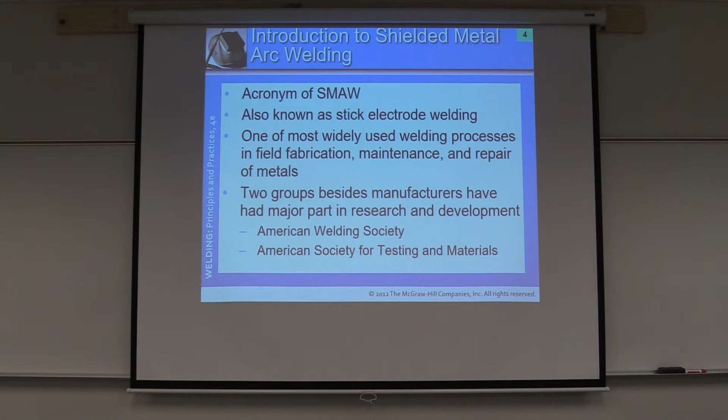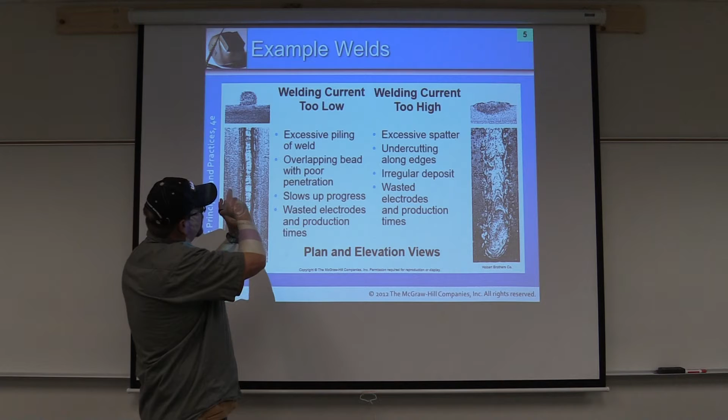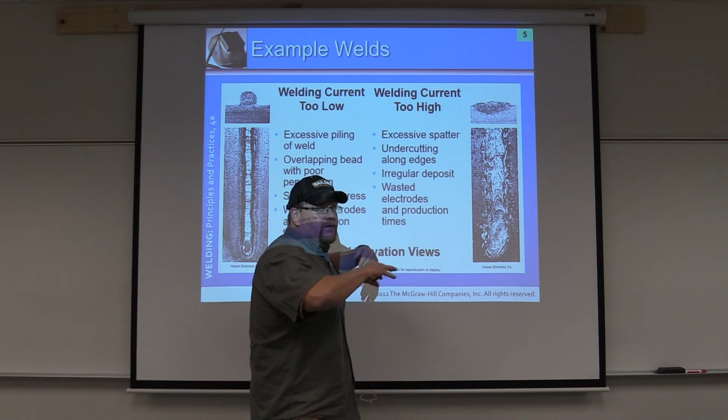Good examples, we'll see most of these in the welding shop, we'll go through a lot of this. However, let's hit a few points here. So you notice how this weld profile is very tall and crowned over. Looks like it didn't get that great of fusion into the base metal and so forth. On this side, you can see it's the exact opposite. It's really wide, very flat. So that's really high welding current.

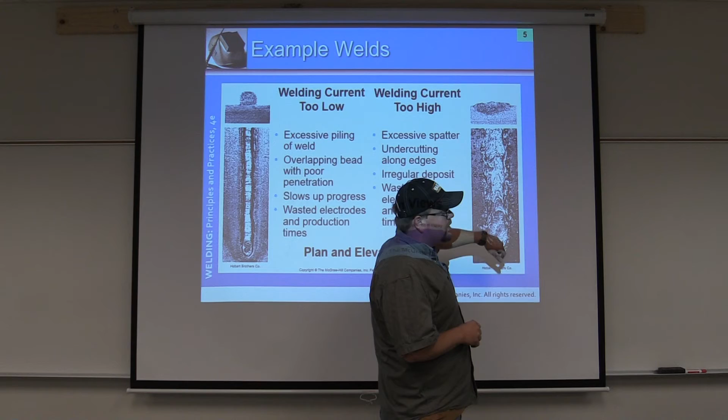We've got some V-shaped notches within our welding material. That also means we're going too fast. Of course, we have to with too high heat. In this case, it's a nice rounded profile. We went probably about the correct speed. However, we just didn't have enough current to be able to fuse into the base metal.

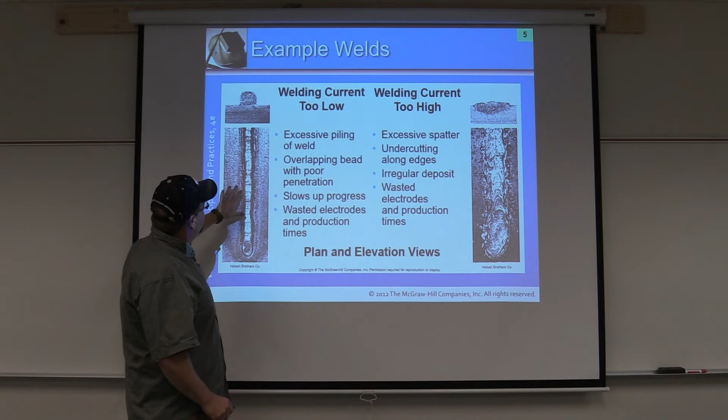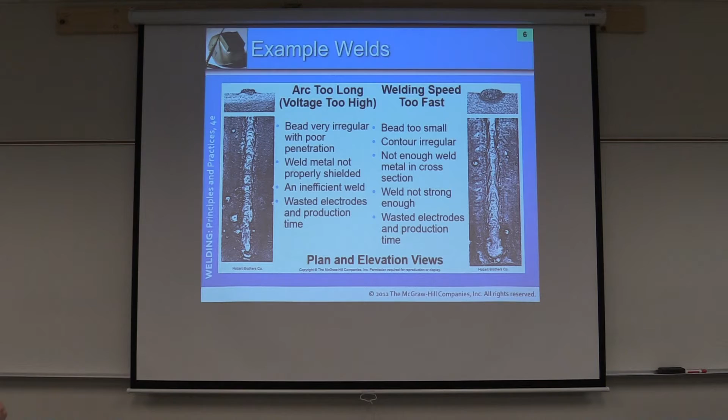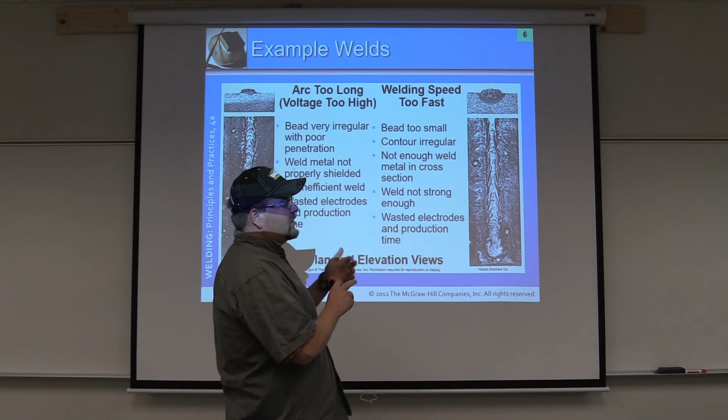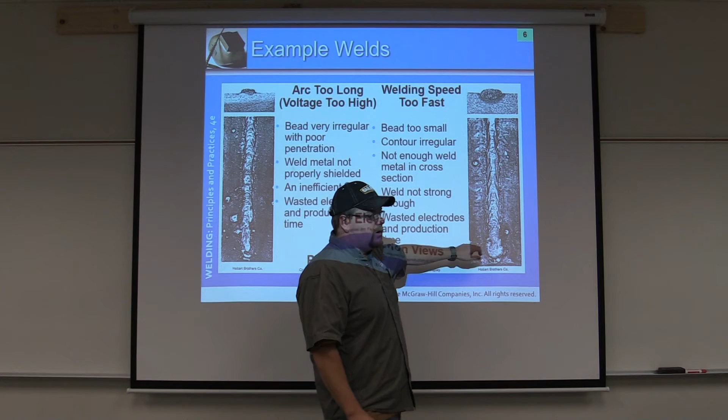Welding speed's too fast. Again, here on the right hand side you can see we've got our sharp elongated notches. Now certain materials, we're going to kind of look for that as well. So sodium cellulose rods, 60-10, 70-10, 80-10, 70 plus, and so forth, you're going to want to see a little bit of ripple, but that's some different manipulation of the electrode for different reasons as well. You'll see this, it's very common in API 1104. We'll discuss that on a one-to-one basis as we're welding in the shop.

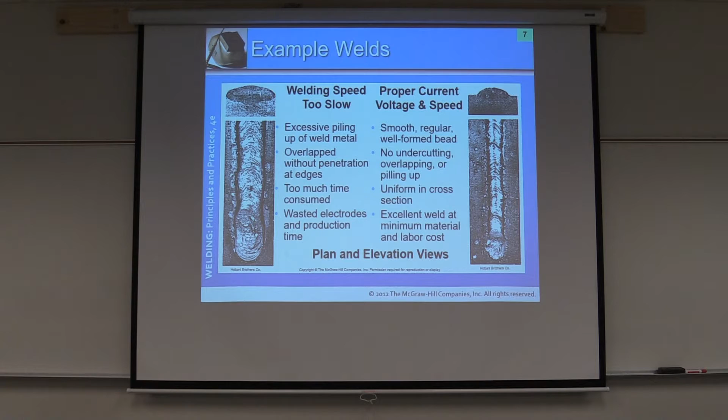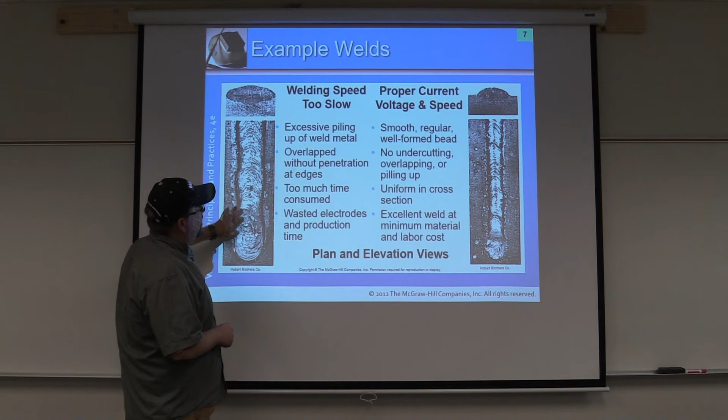Too slow. This one's about right. Okay, so you can see this one's real wide. Now this one can also be associated with a weave bead. If you're covering a couple distances, you may see a couple rod distances, you may see a little wider profile. It's got a nice gradual roundedness to it. The weld beads look pretty good. There's a little bit of spatter, so forth, we'll discuss that in the shop itself. But on this one, this is a nice single bead, just a stringer bead dragging it along instead of a weave bead. Okay.

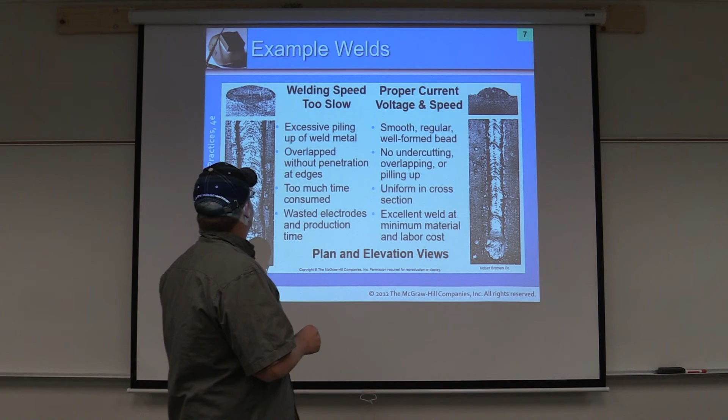All right, so we're going to start out of the book, page 310, chapter 12, right-hand column, underneath Introduction to Covered Electrodes. The type of covering influences the degree of penetration of the arc and the crater depth. Now that's a bulleted point. Definitely.

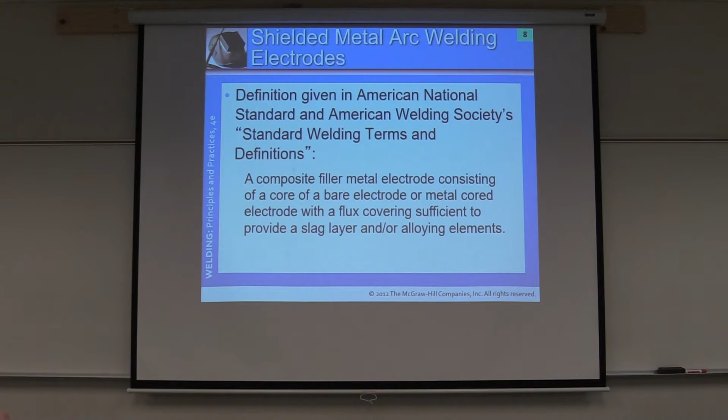So it affects the extent of the recrystallization and annealing of previously deposited layers as well. Sorry, let me back up here, I read off the PowerPoint. Now we're going back to the book, page 310, under that same paragraph. Let's read that paragraph, and then we'll come back to the PowerPoint.

The type of covering influences the degree of penetration of the arc and the crater depth. The proper electrode selection therefore makes it possible to obtain sound welds in close-fitting joints and to avoid burning through poorly fitted joints. Again, everything is relative to what we need. There are times when we're going to want to open up the keyhole and make a burned-through weld joint, okay?

All right, let's continue reading. Since the covering influences the extent of penetration, it affects the extent of recrystallization and annealing of previously deposited layers. This characteristic improves the internal or radiographic quality of the weld. The low electrical conductivity of the covering permits the use of electrodes in narrow grooves. The covering also reduces weld spatter. So it helps stabilize the arc as well.

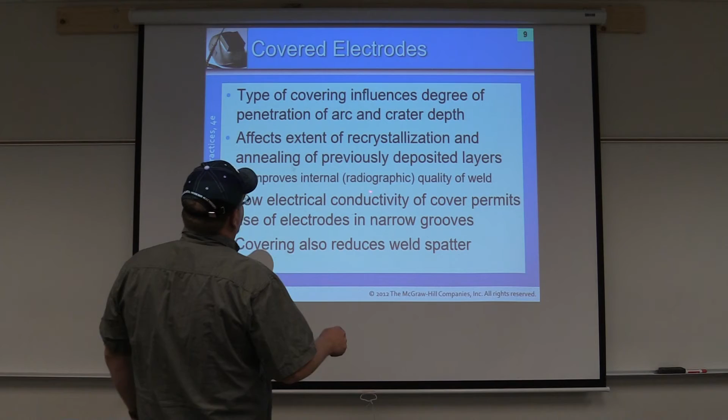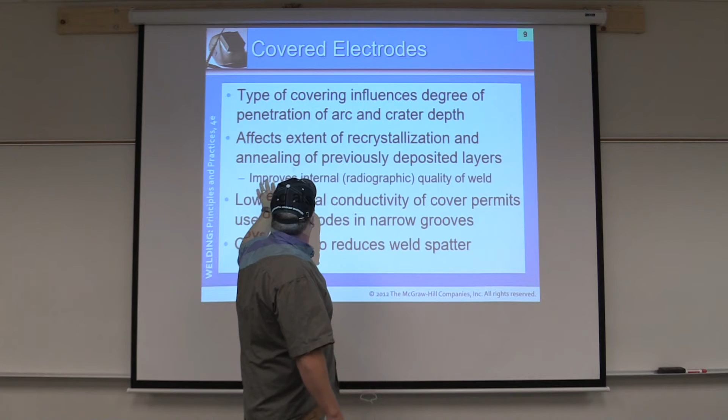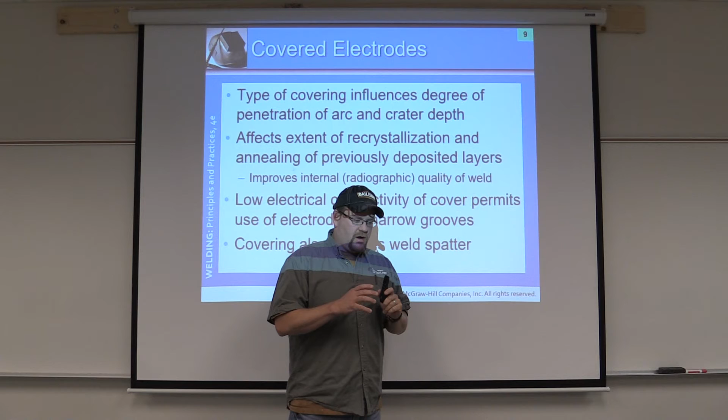Okay, so let's go back, I want to catch something real quick. So radiographic, okay, radiographic is one means of non-destructive testing. Okay, so just to clarify, it improves the internal quality of the weld. That's the main portion. The radiographic piece, that's how we're going to come back to see the internal quality of the weld, to make sure that there are no discontinuities or it's within code specification. All right? Just to help clarify a few things there.

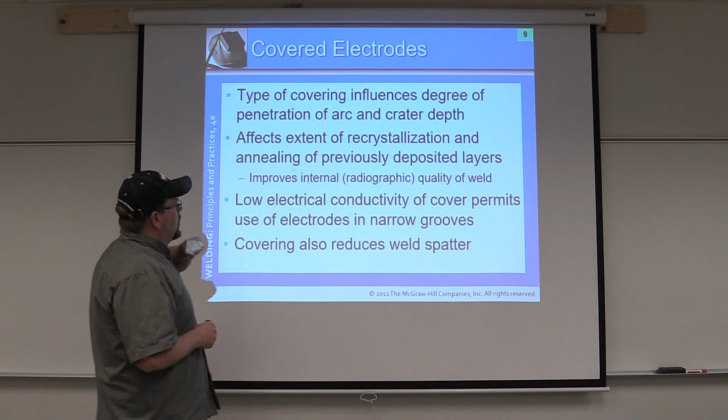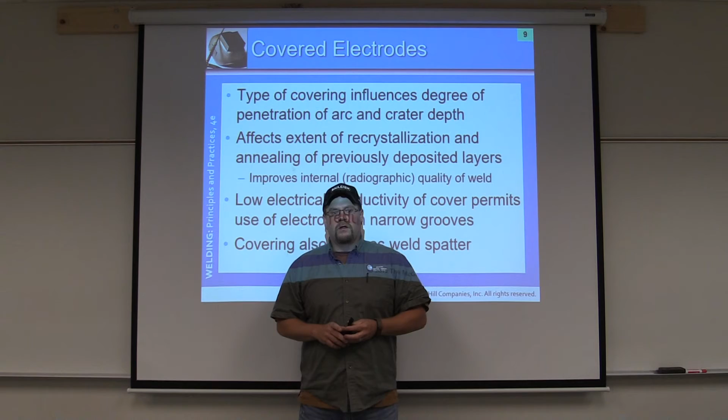The outside is our coating. So what we need to do in that case is we probably need to come in and either open our groove up if allowable, so our root opening needs to expand. Then our welding electrode would actually fit within that weld groove and get down into the root opening to where it would create a solid weld. And that's what we're discussing about the electrode covering can sometimes be too large to fit into the groove.

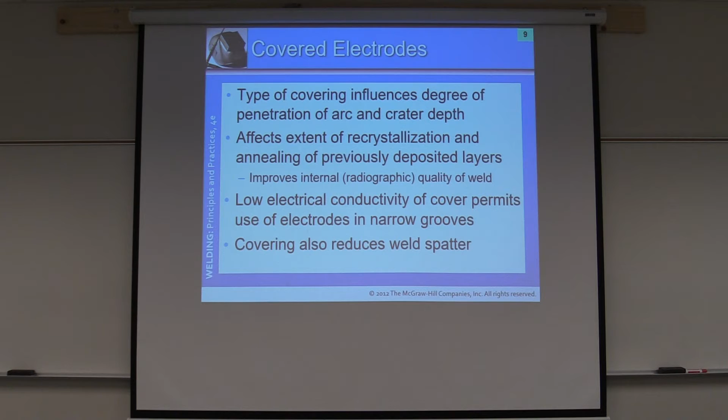Let's move on to the next piece. Protective gaseous atmosphere and slag covering. Okay, so we're under the functions of electrode. In the book, we're on page 311, chapter 12, underneath functions of electrode coverings. Let's read from the book. Now this paragraph has several bulleted points in it that could come out in questions.

The covering materials on the electrode provide an automatic cleansing and deoxidizing action in the molten weld pool. By supplying a protective gaseous atmosphere and blanket of molten slag for the weld metal, the covering excludes harmful oxygen, nitrogen, and hydrogen as well.

The extent of gaseous and slag protection depends on the type of covering. In addition to protection, slag performs the following functions. And I would understand what these bulleted items do. I would kind of keep those in mind going through this, okay? Acts as a scavenger in removing oxides and impurities, slows down the freezing rate of molten metal, slows down the cooling rate of solidified weld metal, and it controls the shape and appearance of the deposit.

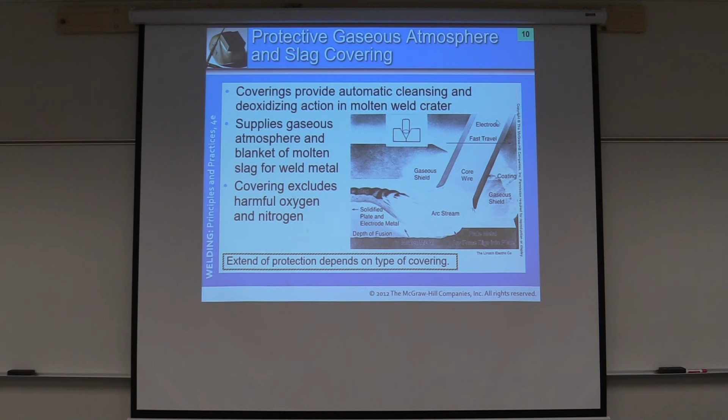Uh-oh, something happened with my PowerPoint here. Alright.

Okay, reading from the book, page 311, left-hand column underneath alteration or restoration of base metal. To a large extent, the covering controls the composition of the weld metal, either by maintaining the original composition of the core wire of the electrode or through the introduction of additional elements. In this way, alloying elements are added to the weld metal or lost elements are restored.

For example, molybdenum and vanadium may be added to the covering because these alloys produce better physical properties in the weld metal than those possessed by the core wire. On the other hand, manganese is usually included in the covering to maintain the same manganese content in the weld metal that was present in the core wire. The coating may also be balanced to adjust the carbon and silicon content of the weld deposit.

Bolded item coming up, keep reading. The addition of large amounts of iron powder to the coating of an electrode increases the speed of welding and improves the weld appearance. In the intense heat of the arc, the iron powder is converted to steel and contributes metal to the weld deposit.

So we kind of talked about that in chapter 11 a little bit. I said we'd get into it a little further as we're going along. Let me finish this paragraph and then we'll talk about it. Low hydrogen electrodes greatly improve the welding of high carbon and alloy steels, high sulfur steels, and phosphorus bearing steels. Such steels tend to be porous and crack under the bead. The reduction of the hydrogen content in the weld eliminates these harmful characteristics.

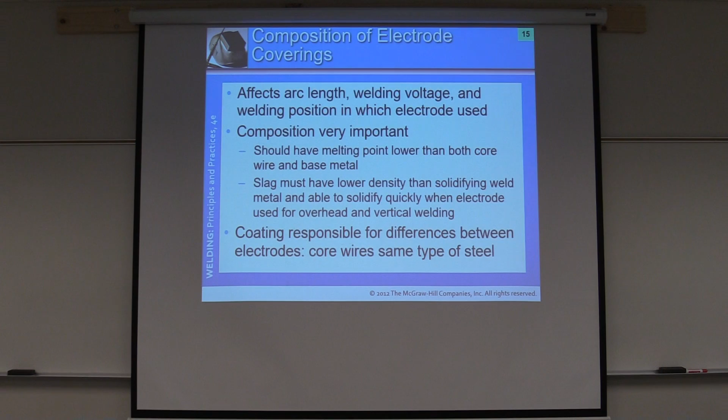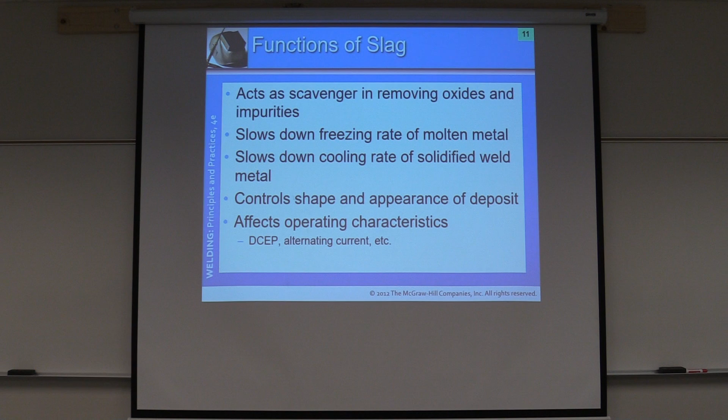So here we talked about the addition of large amounts of iron powder to coating of an electrode. So 7018 is one of them. 7024 is also an iron powder. These topics we talked about in chapter 11 will have a lot thicker flux coating than other welding rods, so that way the iron powder will be able to add material to it. So it puts a lot more metal down. The deposition rate is higher.

Okay, I'm going to stop here. We'll pick back up here in a few minutes.